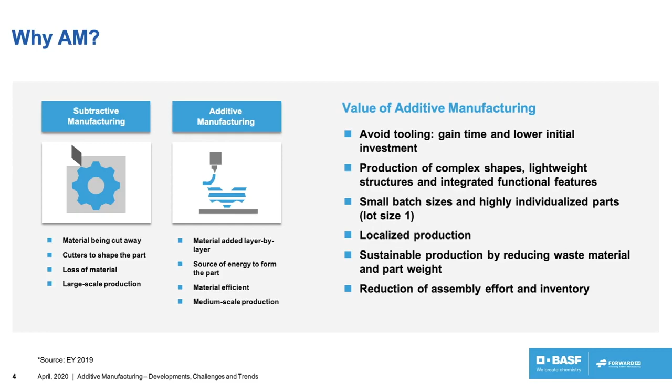So you would say, with all these arguments, why is additive manufacturing not more widely spread? Because at the end of the day, we should put it in perspective. If you compare, for example, additive manufacturing with totally irrelevant markets like the avocado complete market, or the Black Friday digital sale, or Apple AirPods, or the manual toothbrush, or ski equipment, which is for me more important, you see that actually additive manufacturing is not yet a really big thing.

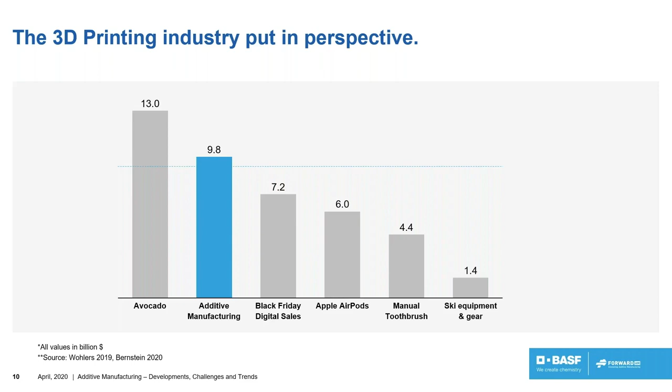Like if you would compare it with the global manufacturing market, which is 1,000 times bigger, a 12,000 billion dollar market. So why is this? To understand this, we need to go back a little bit in history. On this time frame, you can see that additive manufacturing was invented way before the internet. However, it didn't get the development of the internet. With a 10 billion overall business, 3D manufacturing is a drop in the ocean compared to the big internet companies.

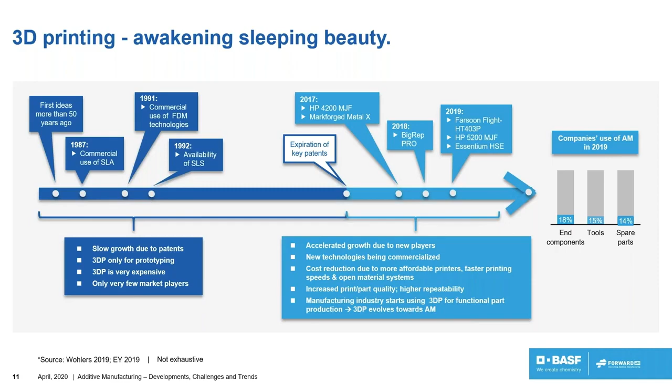The first commercial and industrial 3D printers were introduced in the 80s. However, at the time, all the technologies were patented, making it difficult or impossible for new entrants to come in and make this technology at a lower cost. It was then a high cost technology reserved mostly for making prototypes. It is only around 2014, 2015 that patents started to expire, and this made it possible to have new entrants. This is actually when the general public and industry started to hear more about this technology.

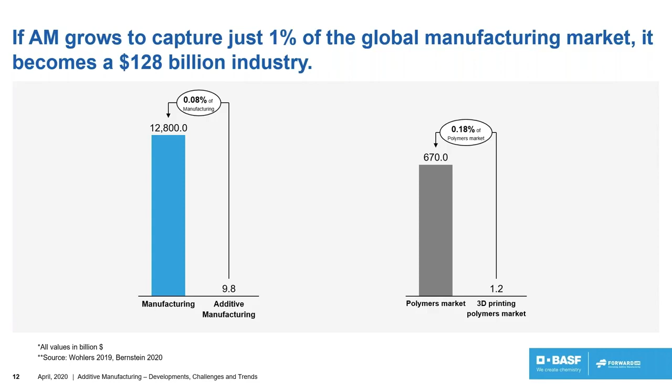So now if you put additive manufacturing in perspective compared to standard manufacturing, you see the huge potential this technology has and the huge market it is addressing. Compared with general manufacturing, it is less than 0.1%, and compared to the polymer industry, the polymers used in 3D printing are less than 0.2%.

And therefore this technology is growing. As you can see on this graph, the growth rate is between 18 and 25%. It depends on which studies and sources you use, but it's definitely a high growth market. It's expected in 2024 to reach around 35 billion.

It's growing thanks to the use in more and more serial production applications, thanks to new technologies and new materials which are making additive manufacturing more affordable, faster, and more reliable. But also thanks to new business models. Take, for example, the dental aligner market, a 1 billion industry which grew based on total market disruption, replacing metal wires by thermoformed sheets on 3D printed molds, mostly done with UV resins.

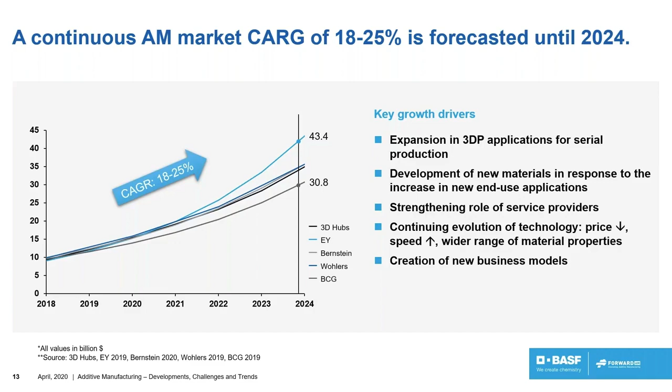So in many cases, 3D printing will not replace traditional manufacturing methods, but either complement them or participate in the disruption of the business model. But of course, it will need an evolution in TCO, total cost of ownership, with better price of material, better price of printers, higher speed of printers, and a wider range of materials.

However, the growth of the industry could even be faster. Many studies are identifying the two main barriers for a faster adoption. The first one is the cost of the produced part, as I said just before, the TCO, the total cost of ownership, which is a mixture of the cost of the raw material, the cost of the printer, but also the printing speed. So you can have a printer which is maybe more expensive, but much faster. At the end, it will have a better TCO for the part.

And that's one of the biggest hurdles, as you can see on this graph, which is saying both cost of material and systems. But the next one is the lack of additive manufacturing design know-how. Indeed, after more than 60 years of basically using the same method, which is injection molding or extrusion, we need to switch the minds and start to design for additive manufacturing.

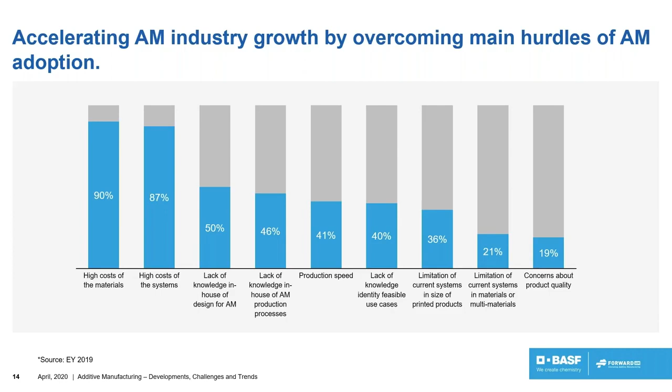We will detail this in a separate video of the webinar series, but in general, if a part is designed for injection molding, it is likely not to function if you print it, or only a very little percentage will be working. And if you do that, you lack the advantages of additive manufacturing, which is the freedom of design to reduce assembly, for example.

This is another study made by Sculpteo showing basically the same results. So the cost of the material, the cost of machine, so the TCO, are the main hurdles. And that's why today additive manufacturing is still used mostly for prototyping or for production helps, which are called production jigs and fixtures, and still very little in industrial serial production.

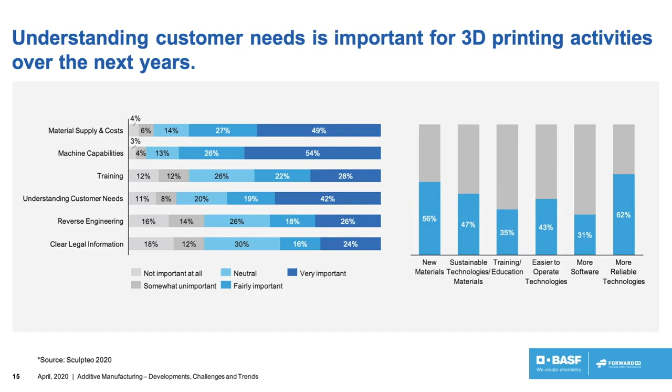But most studies show it: in 5 years, additive manufacturing will be a mainstream technology for manufacturing of parts. At Forward AM, we are convinced that additive manufacturing will become a mainstream production technology, and we are committed to make it happen. This is why our company goal is to drive additive manufacturing forward. Therefore, our new logo, Forward AM.

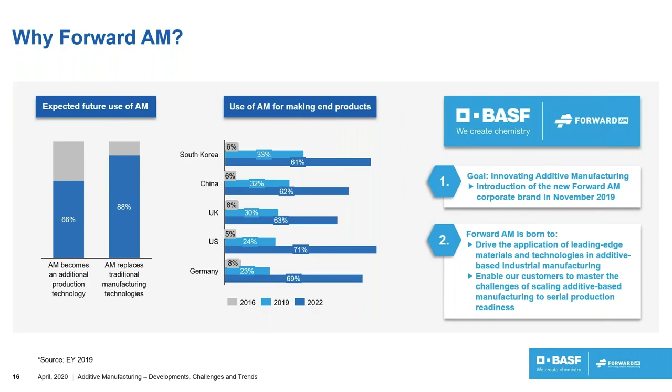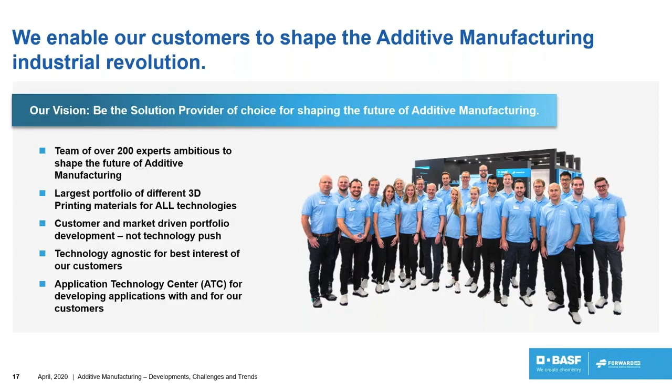So, although BASF officially established its activities in additive manufacturing in 2017, we count today over 200 specialists developing and manufacturing products and services for all technologies, whether it's filament printing, UV resin, or powder bed fusion. We also support our customers in design for additive manufacturing and consult and support them on their journey to additive manufacturing, from ideation to finished product.

So what else do we do to contribute to the acceleration of the additive manufacturing market? Well, we do that by developing new products and new types of applications, also by doing acquisitions to get new technologies. We also have a venture capital arm under BASF which supports companies with new ideas using 3D. And we work together with some partner printer manufacturers.

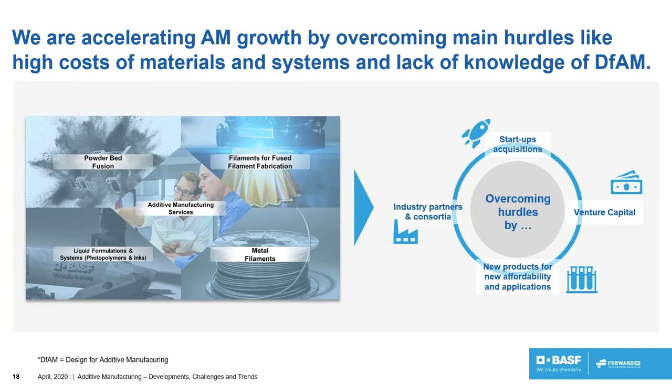Some examples of what we did concretely: there were some acquisitions, Innofil3D in filament, Advanced 3D Materials for powders, Setup for R&D and manufacturing of powders, and more recently, Sculpteo for manufacturing of parts, mostly to support our end customers to go into serial production of parts. We also work together with some printer manufacturers for big size or fast printing, like BigRep, Essentium, or Prismlab, where our venture capital invested.

But more important to us, and the core of our work, is we develop products for affordability and for new applications. Here are some examples of products we have introduced in the market, like the PA6LM, which is a PA6 powder processable on low-cost machines at a reasonable price, RG35, which is a UV resin, also affordable, and UDM01, which is a dental mold resin we're introducing at an affordable price. And a bit before that, we introduced the HP TPU01 for flexible applications, enhancing the spectrum of applications you can do with 3D printing.

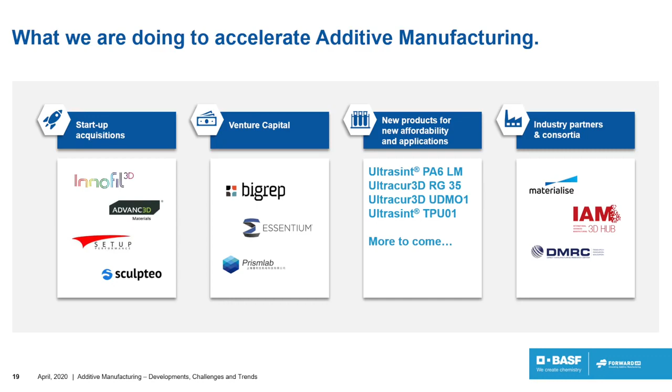And finally, last but not least, we work with industry partners, for example Materialise, but also with consortiums like IAM 3D Hub and DMRC.